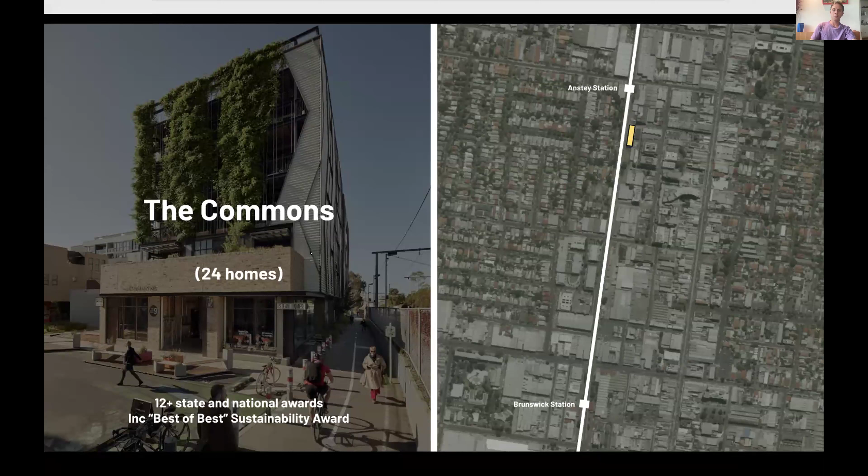The Commons has 24 homes and was awarded best of the best in the Sustainability Awards. Just across the road here, you may have seen photos of this project, is Nightingale 1, 20 homes. Down the road and in between these buildings is Florence Street Parklet. It's not much, just a little dead-end street, but it's a place of activity and life that we continuously activate with resident events.

Up the train line is Nightingale Anstey, which is 54 homes, tile houses, affordable rentals. Down the train line is Nightingale Evergreen, the first of 6 buildings in Nightingale Village. Nightingale Evergreen was designed by Clare Cousins, architect. Claire is an incredible architect and has been an absolute force on this project. As you can see, she's really adhered to the robustness and stripped-back materials. This is a north-facing, one-bedroom apartment.

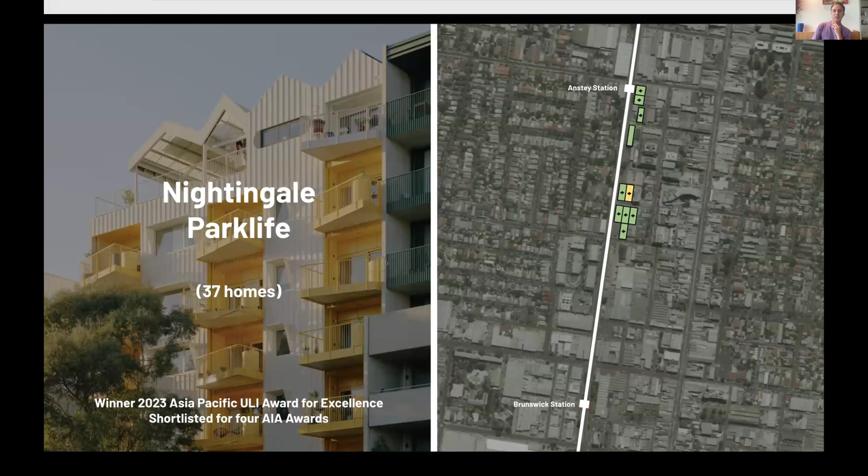Next to there, you have Nightingale Parklife. I'm currently sitting in my friend's house in Nightingale Parklife. It's designed by Austin Maynard Architects. As you can see, there are material selections that continue across buildings, but through minimal things like paint or just raw materials, you can see they allow different personalities.

We have Nightingale Left Field, designed by Kennedy Nolan Architects, 28 homes. This is their rooftop - it's got a beautiful sunny rooftop deck. This space has since grown incredibly lush.

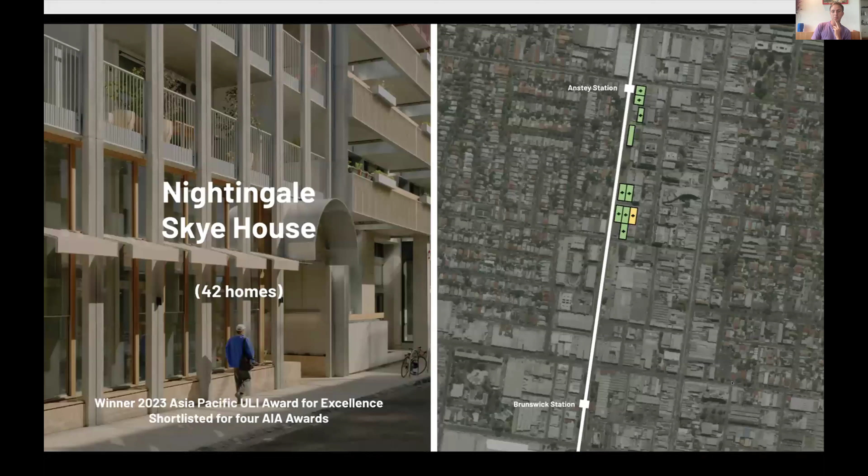We have Nightingale Courtyard, designed by Hayball Architects, a larger Melbourne firm who created an incredible project here. This project, in regards to its design, was centered around a central courtyard and had a variety of apartments available. We had Skye House, 42 homes, designed by Breathe Architecture, and this is a shot of the interiors there.

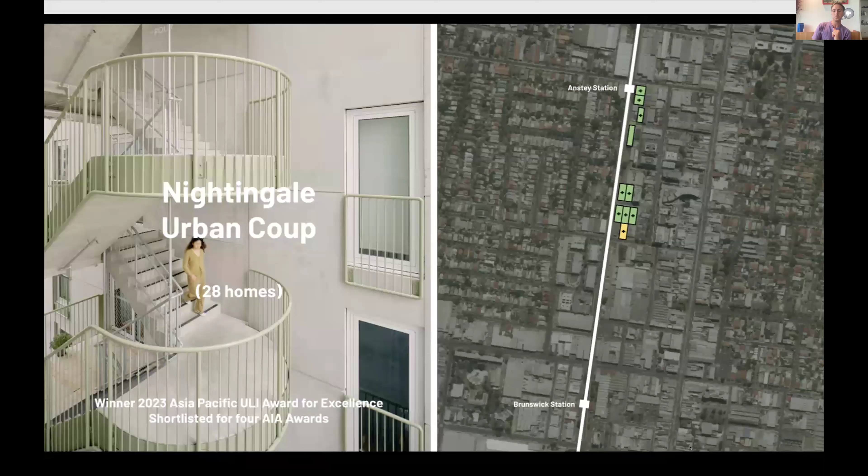This project has a mixture of 2 housing providers in it: Housing Choices Australia and Women's Property Initiatives. They rent 20% of this building out at affordable rates to either of those 2 groups. And lastly, Urban Coup, designed by Breathe Architecture, is a slightly different project, almost more of an intentional community where a group of people came to Nightingale to assist them with developing their home.

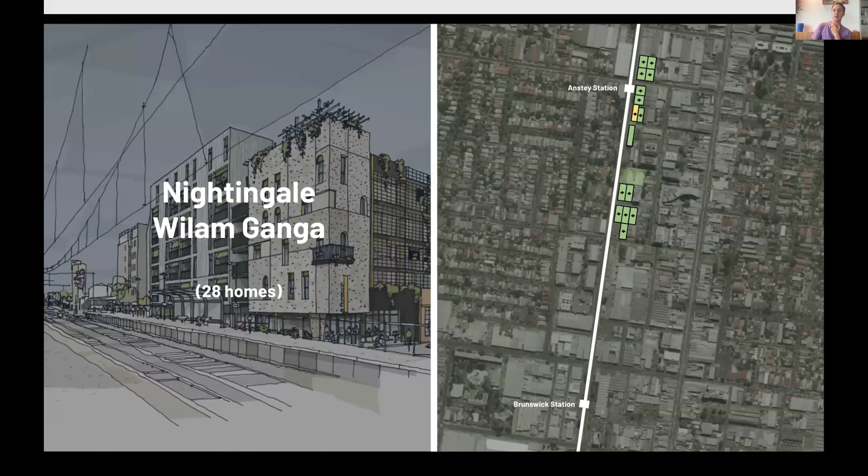We have projects in WA, Nightingale Fremantle. We have an incredible project in Adelaide, Nightingale Bowden, which, in regards to affordable housing, was part of an urban renewal precinct master planned by Renewal South Australia. This project was sold at affordable rates throughout the entire property, with the government subsidising the cost of the land and assisting with the development. 50% of the project is affordable rentals and 50% was affordable purchase. We have Nightingale Preston, a similar project, and hopefully Nightingale Brompton in South Australia coming up as well.

We recently completed Nightingale Ballarat, where you can see we reused a lot of materials - this is solid recycled brick in line with existing buildings. One of our older projects is Nightingale 2 in Fairfield, designed by 6 Degrees Architects, an incredible project, as well as Nightingale Brunswick East. About to go into construction is Nightingale Umarkoo Wayi, designed by Kennedy Nolan.

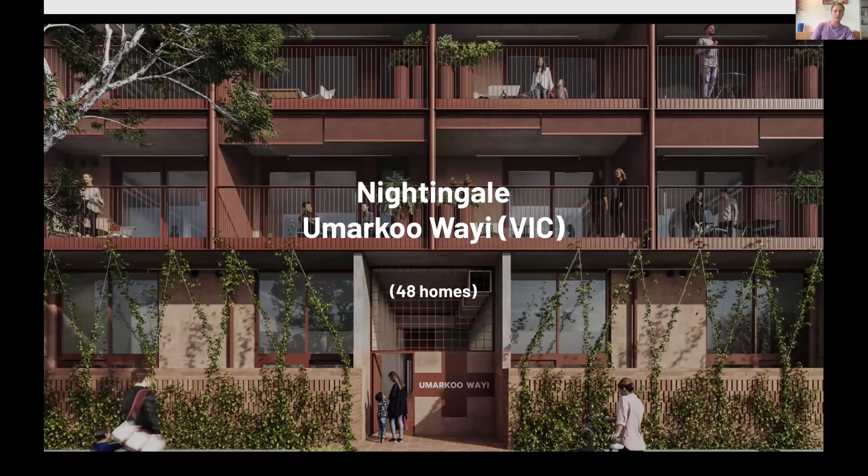Now, this project, Nightingale Marrickville, is based in New South Wales. There's 55 homes there, and this is a new project for us - it's our first full rental. It's land that is owned by a church group.

There was a church on this site of land, and they looked at it and thought, we can do better here. This church is currently utilized for Bible studies about 2 hours a week by 12 people, and for them, that wasn't delivering on mission. They said what this community needs right now is affordable housing, and they came to Nightingale and asked us to assist in looking at this site. So they are the developer, and we'll be renting out these units starting next week. I'm actually going up next weekend to have an open inspection for potential tenants, who will be rented at 80% of market rent in the Marrickville area.

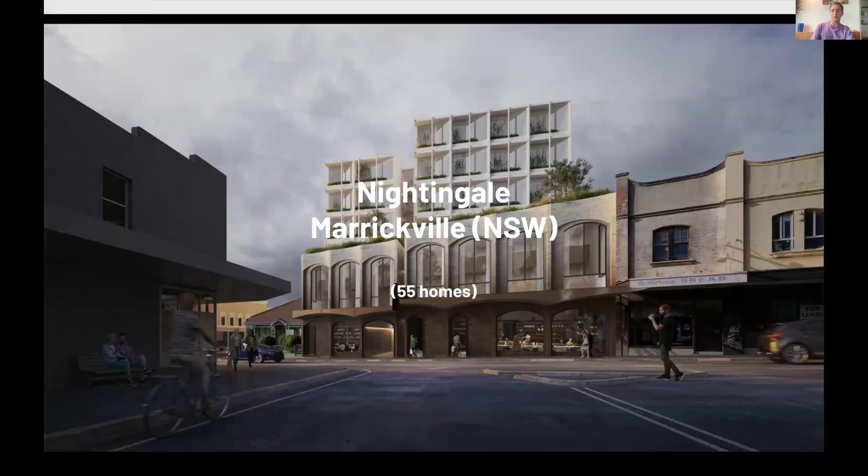We hope that projects like this will cause others to do the same and take initiative within their own council.

I guess some of the things that we face as barriers - we're pretty happy to talk about all our wins and all our beautiful projects and the incredible architecture, but I think some of the things I wanted to talk about this evening is having access to land.

Land prices in Sydney have locked us out of Sydney, essentially - they're too expensive for us to build affordable homes on, sadly. And land is getting harder and harder to come by. It's also a tricky concept in Australia where it's unceded land as well, and so we're essentially building on stolen land. We'd be open to many different initiatives regarding leasing land, government-owned land, or land trusts, but primarily we do buy and develop on land.

Something that's a huge barrier to us and to many people is access to impact investment. If we are trying to deliver affordable housing, there's the cost of the money to develop - we don't have a huge bank balance, we don't have money in the bank per se. We have to go and find people to invest or loan us money. In Australia, there's this expectation that if you lend someone money, you need to make a healthy return, which is kind of an investment term that can add percentages and percentages on top of the cost of housing. So for us, if there was greater access to impact investment, which is investment based on a lower return, we believe housing prices could go down.

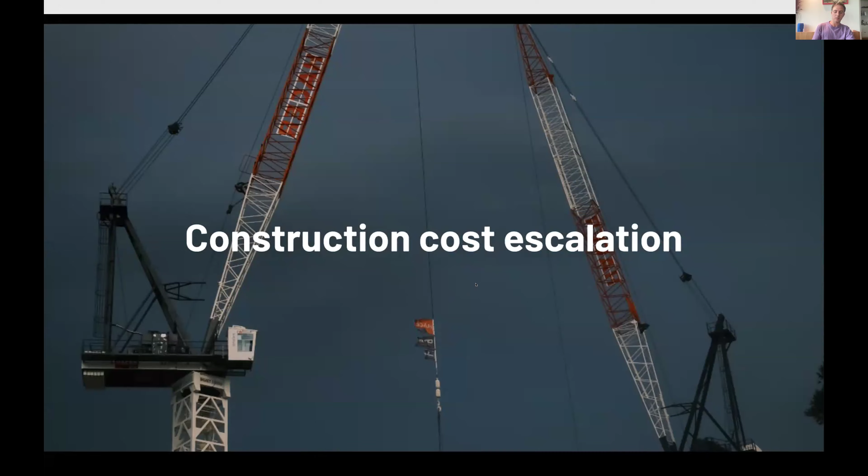As you're probably aware, construction costs have escalated significantly over the last few years. There's also challenges for the CHPs, the community housing providers, though the recent change in federal government has meant things like the HAF fund are changing. I know Victorian state government is taking initiatives, and Queensland has recently released a raft of changes and targets for affordable housing. We hope this can assist CHPs in providing housing.

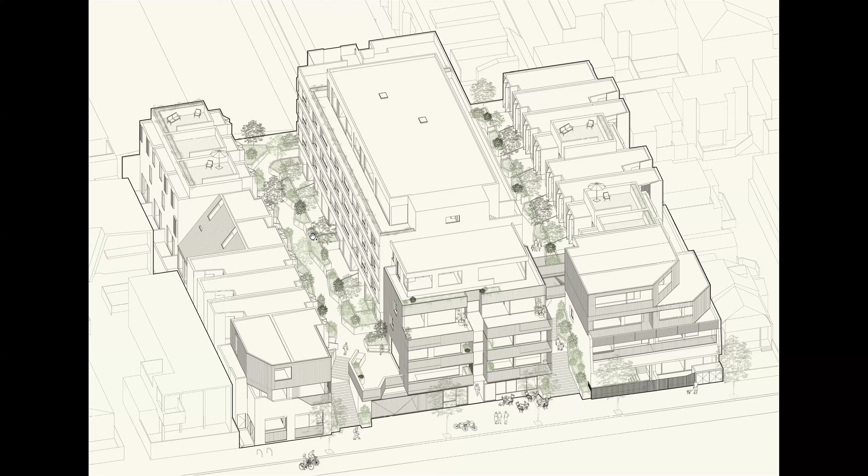And then we've got raised landscape spaces, and here's a cross-section through it. So we had a few issues. One was that we actually had quite a contaminated site, so we couldn't, and also didn't want, to spend all this money building an expensive basement. Very much like Nightingale, we wanted to focus where we spent the money on the things that really matter to the end occupant.

As a cross-section, you see through here the 3-story townhouses on the side. We were very, very keen from the outset to make sure it's a diverse community, so we designed it to have a real mix of different apartment sizes and types. It's actually been a very successful community from the point of view of being diverse — we've got elderly people all the way through to very young people and families. It's a lovely, diverse community.

One of the things that's really helped make the community diverse is that with these townhouses, the ground floor is able to be a completely separate unit — literally this idea of a granny flat. What's really cute is we've actually got two grannies living in separate little granny flats downstairs, while the middle floor is the living space and bedrooms, with the younger family above.

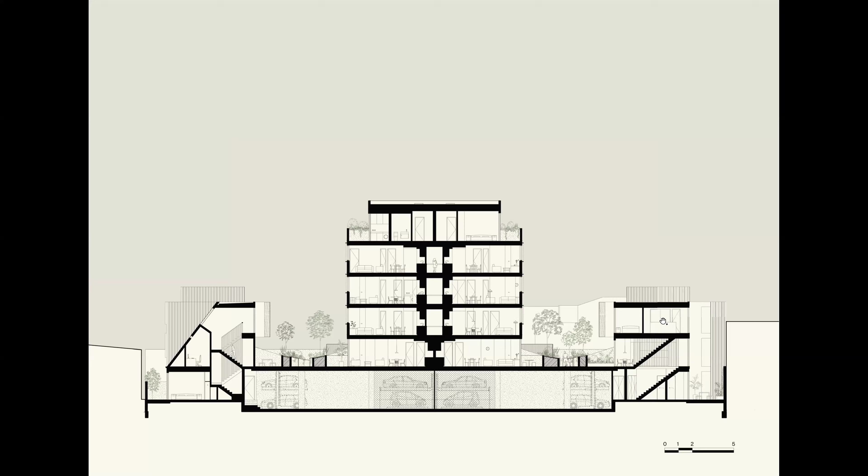If there are any detailed questions about any of these projects at the end, we can always come back to these plans. But really, this is a car park, and I'm going to talk in a bit of detail about car parking when we come to the next project. There's, I suppose, an important point to be made there.

In designing this building, we not only did these sort of surveys, but also did a really systematic analysis of what are the perceived and actual disadvantages in apartment living — what are the things you can't do in a typical apartment building. I'd also spent 4 years living in Denmark and got incredibly inspired by the communal housing that happens over there.

So we incorporated a couple of features into this building that have been really successful. The first one is a multi-purpose communal workshop, and rather than putting it right at the back of the car park, we've put it right at the front of the building. We also have a communal room right at the front of the building here.

It's a 65 square meter space, owned collectively by everyone in the building — we all own it — with an online booking system. It's a really great space because it's adjacent to a little outdoor barbecue area, right next to the staircase where you come up, and it's this really lovely little hub that fosters real neighborliness.

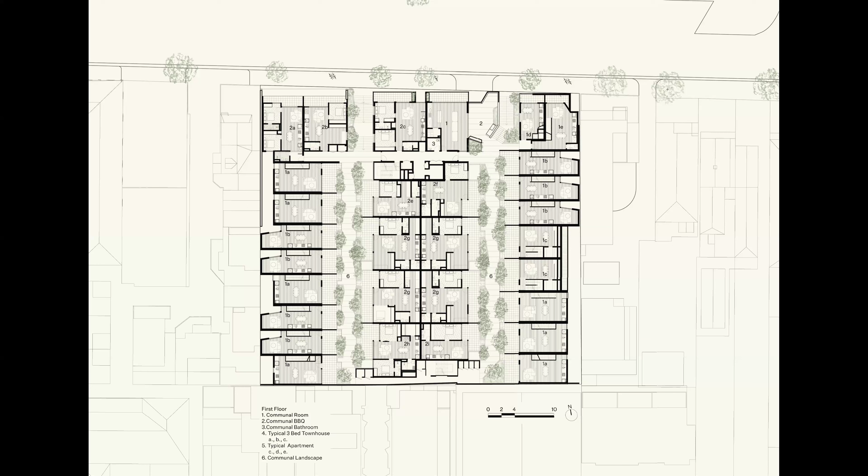The whole idea of this building is about encouraging neighborliness and the kind of interaction between people, really about striking that balance between privacy and ensuring that putting privacy screens and things in doesn't result in isolation. As you go through the building, you can see it's a double-loaded building. In the second project we did for Assemble, we learned from a lot of the mistakes we made in this project.

With architecture, every building is a kind of prototype and you learn a lot of things. The biggest mistake we made in this project is that we actually had gas in the building, so that's something we're now working with the residents to try and retrofit.

It's funny how quickly things change. By the time it was like, everyone's got to have gas stoves - this was 7, 8 years ago - now it just seems crazy to put gas in anywhere.

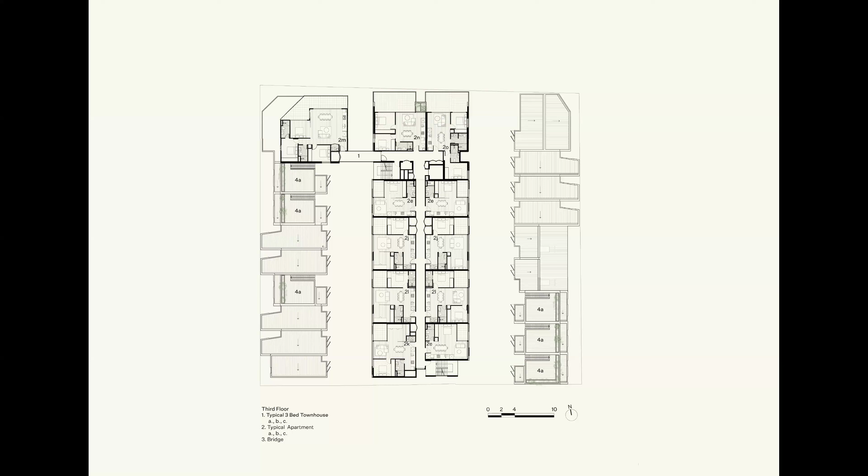By having those large staircases that lead down with no gates - it seems like a very small thing, but we had to work very hard to convince all the stakeholders involved to not put gates on those two staircases. Anyone can wander up, and it's proved to be a very successful thing because it's this kind of invitation to the community, but anyone that does come up is very respectful. You speak to this idea of passive surveillance, and this is a space where you really feel that passive surveillance works very beautifully.

The other thing is out the front we've got that multi-purpose communal workshop. It's not a glamorous space, but it works as this lovely space that really does foster that sense of neighborliness. I just took this little snap a couple years ago - this was actually just before COVID, but it's a fairly typical scene.

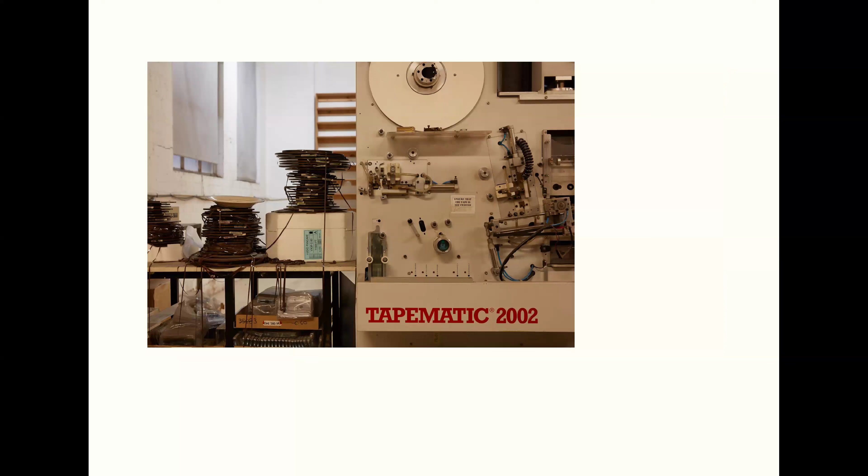There's all these wonderful old machines in there, and a series of diagrams that explain our design thinking with the site. So that's the existing building.

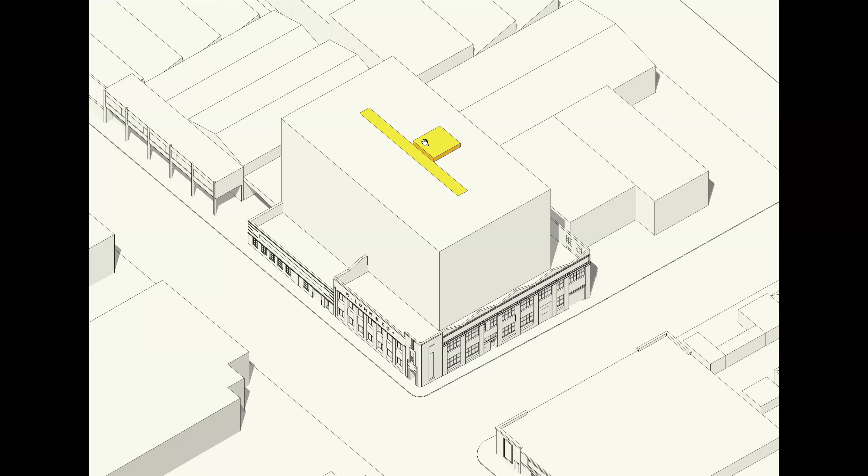A typical approach, and in fact the approach we took in the first Assemble project, would be to do a double-loaded apartment building, where you've got apartments on either side of a central corridor and a lift. We wanted to do something a lot better than that.

So what we did was split the building open. This fundamentally improves the daylight, amenity, and most importantly, cross-flow ventilation. You can draw all the little wiggly arrows you want on a double-loaded apartment plan, but you don't get true cross-flow ventilation unless you've got proper windows on both sides of the building.

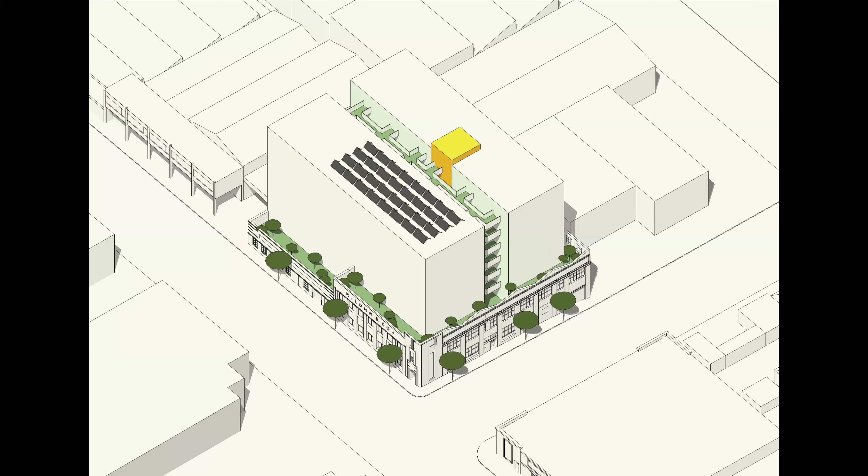It was a real leap of faith for the whole project team, and we're very grateful to Melbourne City Council, who jumped on board with this idea. They allowed us to step out of some of the planning envelopes - this iteration here would have fit in the planning envelopes, but they allowed us to challenge and reduce the setbacks because they believed in the improvements to amenity that would result from this. In this project there's also a huge focus on communal amenity, which I'll speak to in more detail in a moment.

Here's a cross section, so you can see the retained warehouse space - we tried to retain it for at least a room depth. But the main thing I want to point out is that every single apartment gets a completely private terrace, in this case facing south or facing north.

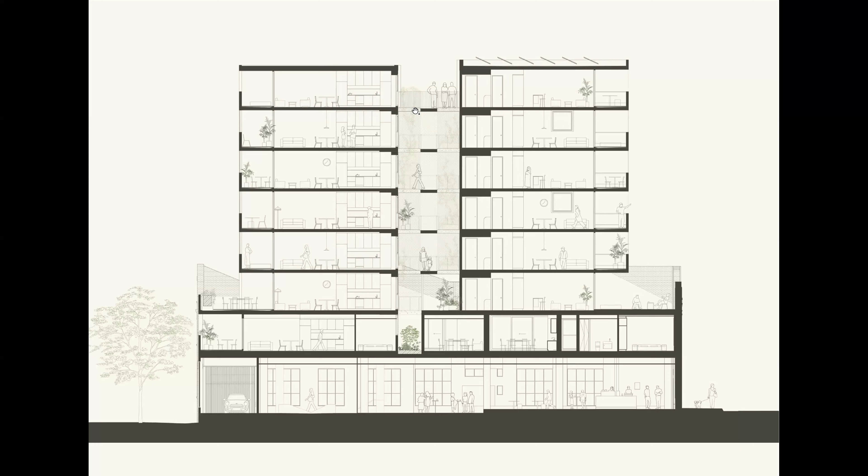That's the other reason for the orientation of the site - we wanted to try and get as much northern light into all the apartments as possible. With a double-loaded building, a completely south-facing apartment, it's impossible to get any northern light into it. So each apartment gets a totally private terrace, and their living spaces connect back through a series of little bridges that go into the communal walkway in the middle - these are sort of semi-private access spaces through the back.

On the north, we've got these ribbon balconies that wrap along the full length of the facade, with a series of perforated screens, but those deep eaves work really nicely in summer. We try to minimize the windows facing west.

This project is 100% gas-free, and it's actually powered entirely by a wind farm in Hepburn. Assemble made a deal with Hepburn Wind, which is really exciting - there's a direct correlation between the energy producer and the building, which is wonderful.

All the glazing in this is thermally broken. It's sort of crazy that it's not mandated in Australia for everyone to have thermally broken glazing. I think things are thankfully slowly shifting - double glazing came in about 10 to 15 years ago, and I think we'll all hopefully need to be putting in, or be mandated to put in, thermally broken frames going forward. With this building, things like the thermally broken frames are examples of where we really try to invest in what makes buildings pleasant to be in.

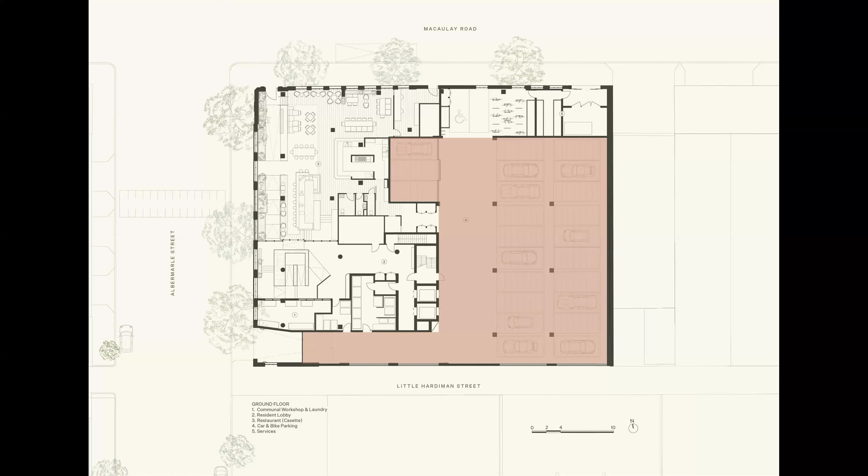We also incorporated soft fall recycled rubber covering, because the building is very much designed to be a place for children - we've got lots of children in this building, and for pets. So the choice of materials, like this very robust dado that runs through - we've actually tiled all the communal spaces up to a certain height, because we learned from our first Assemble project where we didn't have these robust surfaces, people with dogs and kids and prams, it all gets very scuffed up. Part of designing these buildings is to make sure they age in a graceful way.

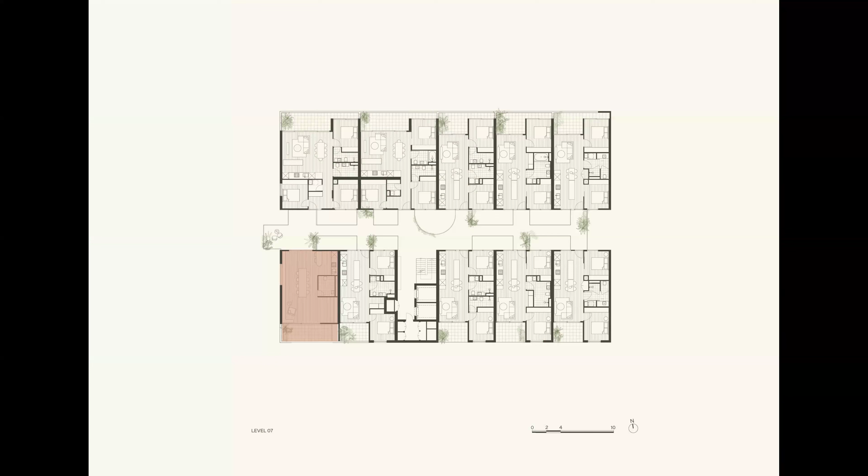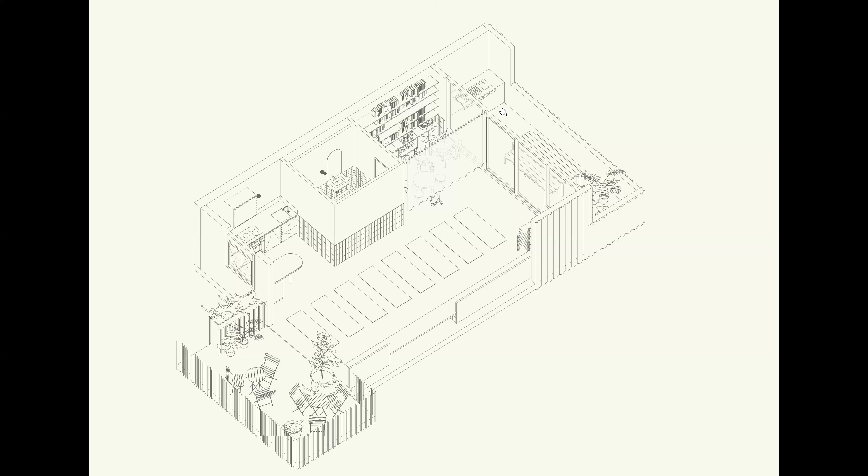The communal room is an improved version of what we did on the first Assemble project, with some little diagrams about the different things that can be done in there. It's designed to have a little kitchen space, a bathroom, a corner which is a library and a bit of a kids' play area as well. It's got a linseed oil, marmoleum sort of resilient flooring, and a little barbecue area out the back.

Our next project, taking us up through the scales, is currently under construction in Brunswick, very close to Nightingale Village and all the Nightingale projects—in fact just a little bit further south in Brunswick. It's a larger site, about 180 apartments.

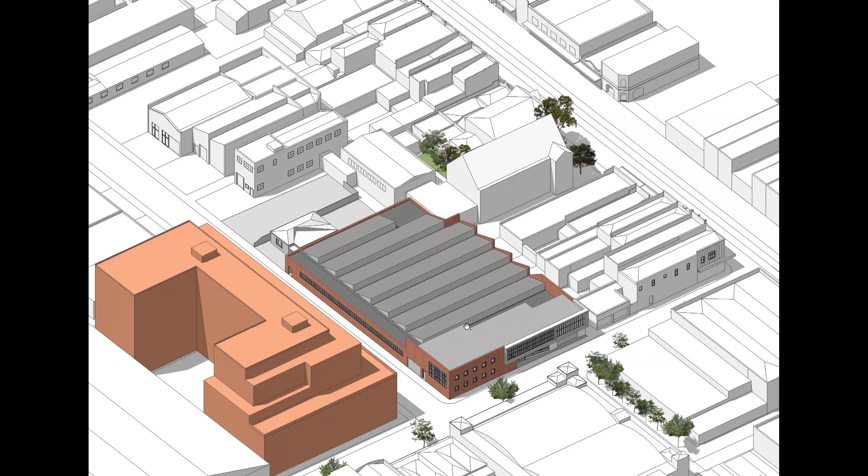So in this massing diagram, rather than do the typical double-loaded corridor approach, what we did is open it up. This is a big U-shaped building, with two cores coming up through the building—one southern core, one northern core—so that all the apartments have got that lovely double frontage and proper cross-flow ventilation.

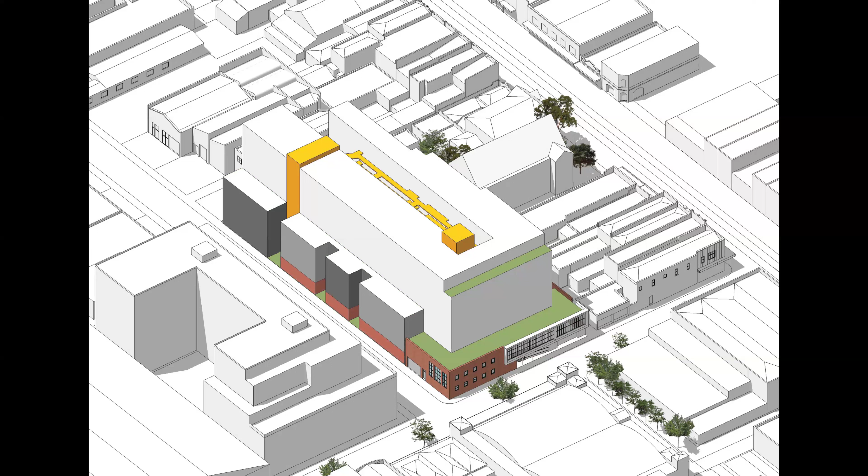We then took that mass and carved it into a series of smaller modules. It was very important in this particular context, which is undergoing rapid change, to make sure the design is able to mediate between the lower scale of the existing buildings and this larger scale that's starting to emerge, trying to be respectful of the scale and character of the streetscape.

So that's the articulation story we went through, and I've got some basic plans to take you through. Essentially on the northern end—a learning we had from the second Assemble project is that there's a lot of need, when people are moving, for a big goods lift.

So in each project now, we've got a passenger lift and a big goods lift that you can put a queen size bed in. There's a big oversized lift there, communal workshop, bicycle repair space, almost like a cobbled laneway that takes you in.

Through the middle there's an extensively landscaped space, and really one thing we've realized with the project I showed you before, Macaulay Road, is as the greenery has really established itself in that central space, it's having a wonderful cooling effect. I didn't include a slide, but on the lowest level of that open walkway, it's almost like a rainforest now. It's a really beautiful space to be in on those very hot days.

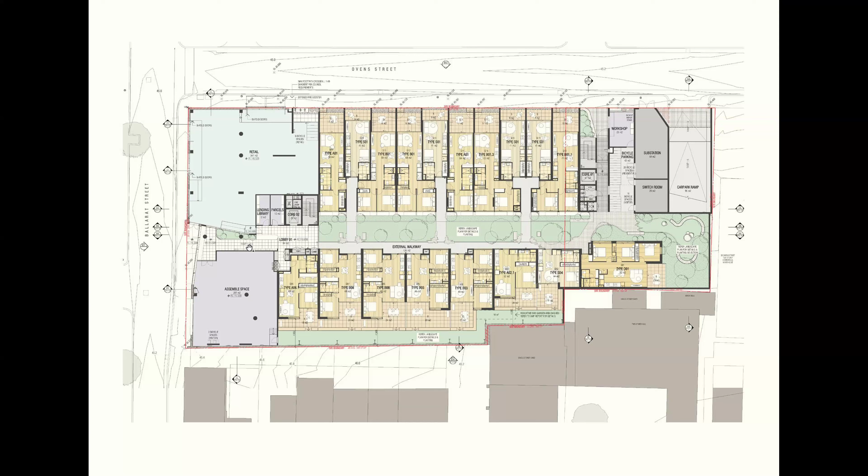On the southern side, we've got a more formal lobby entry. Then as you go up through the building, you can see this is a larger version of that idea, where we've got all these apartments with dual frontage, and apartment typologies where you've got 2 bedrooms that wrap around to a living space, going up through the building.

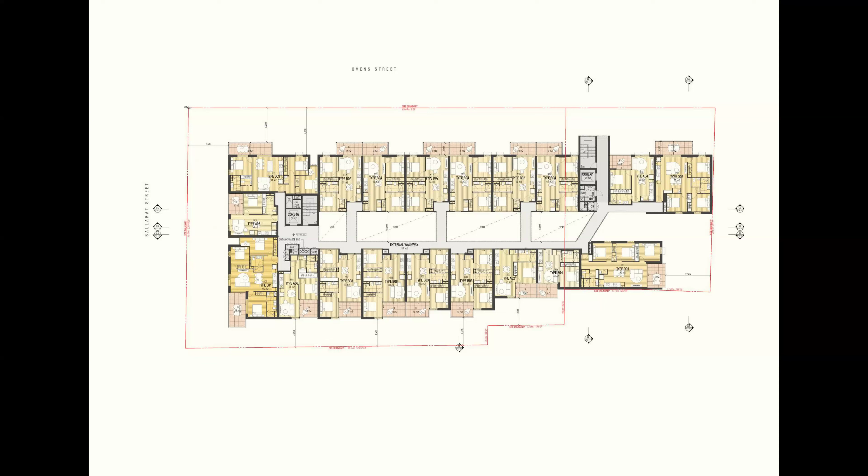Unfortunately, in this project we had to introduce a series of steps which do reduce the structural efficiency of the project, but we had to do that because of the planning controls we had. It's a very tricky thing, but there's a really strong push by councils here to have these podium and tower forms. I spend my life battling against that a little bit.

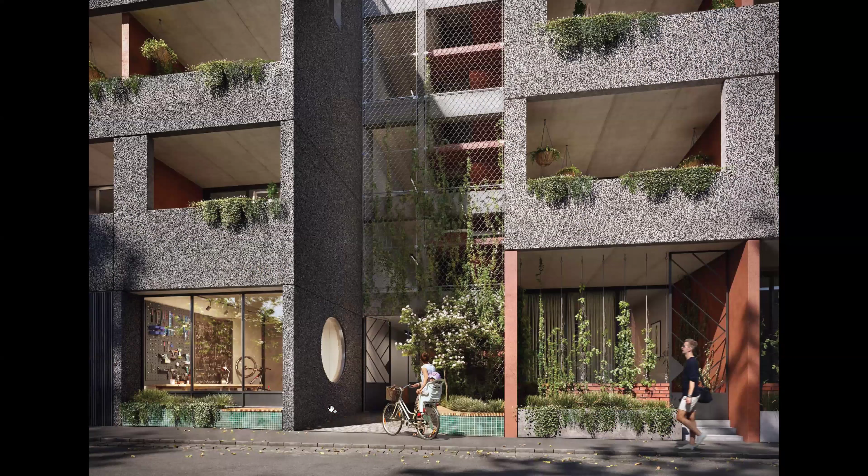The material of the forms going up the street is actually concrete with a crushed bluestone exposed aggregate, so a very rough, robust materiality. On the lower levels, we've got apartments that face out onto the streetscape with planter boxes, and we didn't want to over-enclose these. There was a lot of debate, but what we've introduced is a bit of a gate and some fine wires for creepers to grow up, giving a sense of separation between the public realm and the private apartment.

And then you can see here on the left-hand side, the multi-purpose communal workshop with a bench seat at the front. And this is a larger version - a larger community workshop with more amenities in there.

And then the staircase - like Nightingale, we always try to do our staircases as external wherever we possibly can, rather than the miserable enclosed fire stair that no one ever wants to use. If you really try to celebrate the vertical circulation, open it up so you've got views and a beautiful breeze coming through, lovely ventilation, it's much more likely that people are going to use it.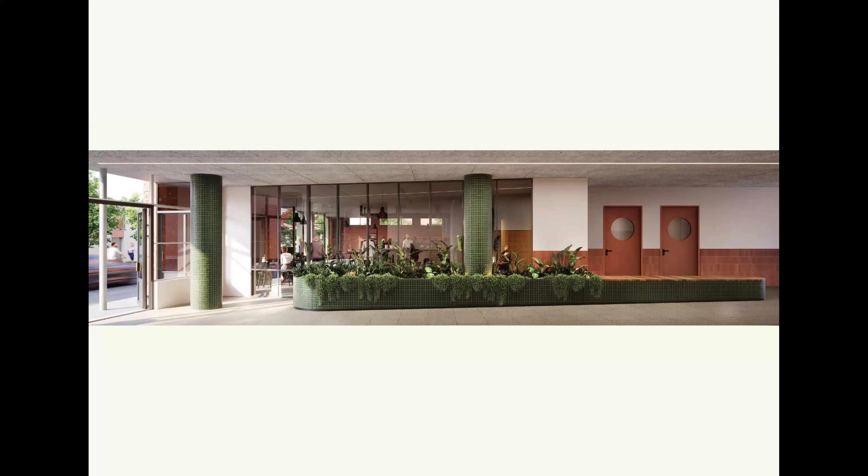The lobby space - why did I put these circles on these doors? I don't know, I was feeling that they kind of got a bit of a bistro vibe. But I think what it was is that, you know, for our parcel room, and also I should mention...

All Assemble projects have got what's called the lending library, which is a room with shelves covered in things that you might only use once every few months, like a dehydrator or a slow cooker or a drill. It's stuff that Assemble has purchased, and then people can also donate. It's this really lovely communal amenity where, for example, at where I live, we've got the lending library set up there, and I use the dehydrator every few months, but I'm glad it's something I haven't bought and isn't using up my cupboard space.

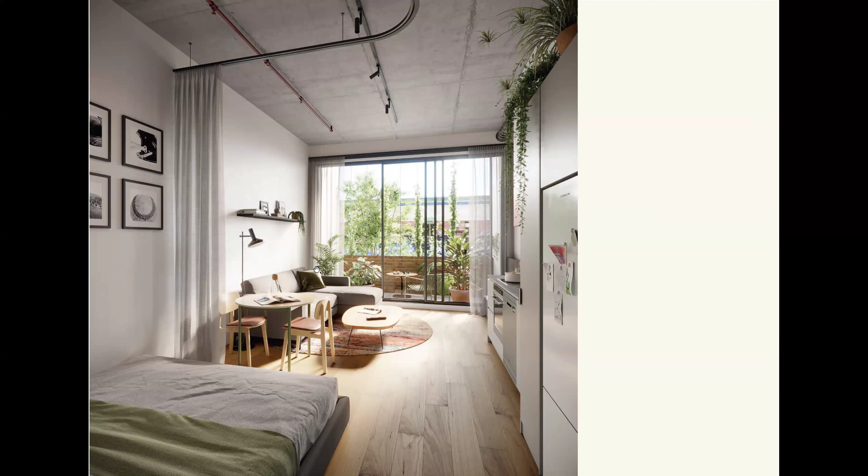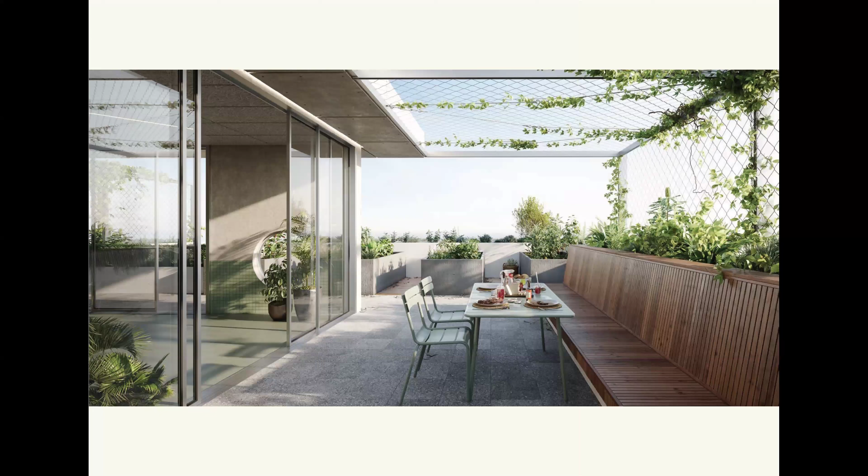Some views of the sort of typical apartments, again with windows and glazing from both sides. In this project we've also got some much smaller units, very much like Nightingale, trying to find a way to bring the price points down. These are roughly 40 square meter studio apartments, and then some communal amenities at the top.

And then these two very large communal spaces adjacent to each other, which can be split with a folding door. Again, this is a larger scale version.

The last project I want to take you through is the biggest Assemble project we've designed to date. It's also in the same neighborhood in the inner north, Brunswick, not far from Nightingale Village, just a little bit further south, about 200 meters south of the project I just showed you. It's on this main train line that runs north-south, and all the beautiful Nightingale projects are up on the top of the page.

It's a very challenging and quite interesting site. For a long time in the office it was a confidential project called Project Bunny, because it was actually a factory that manufactured chocolate bunnies and Easter eggs. When we went in there, there were all these chocolate bunnies, so we called it Project Bunny for a while.

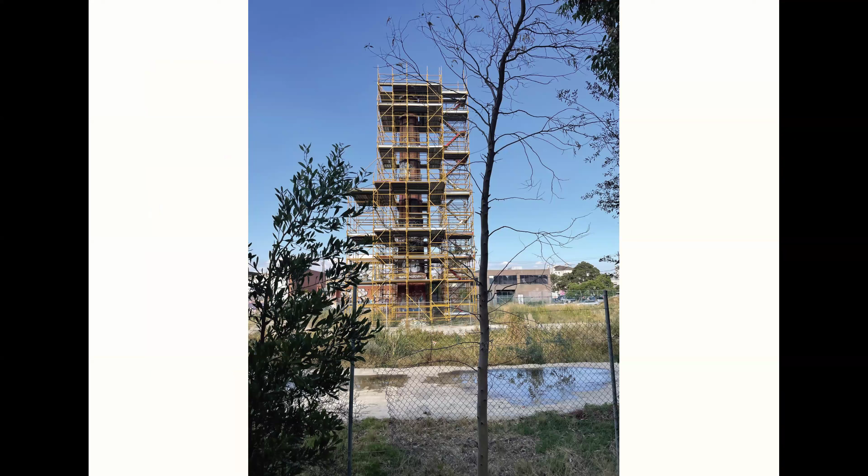It's next to Brunswick Station and has on it a little industrial remnant, an old chimney. Quite a long time ago, one of the previous owners was actually caught red-handed trying to knock this thing down with a sledgehammer by the heritage authorities, and it's literally in this half demolished state, you can see on the left-hand side. So we're proposing to keep that chimney, not to restore it, but to actually leave it like this as a kind of little urban ruin.

So you can see a theme with this of these sort of diagrams. I really love doing these very simple diagrams. When we teach at uni as well, we always try to emphasize to our students to just keep their diagrams as simple as possible to explain the design thinking.

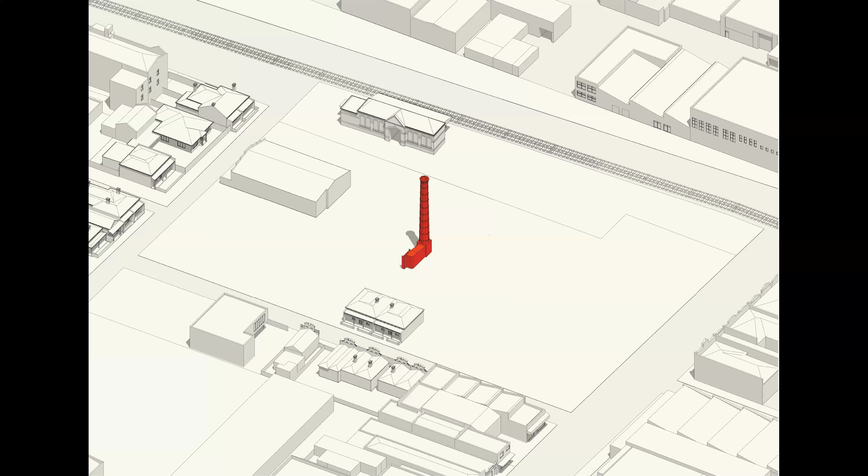So you can see the site there with the chimney in the middle, Brunswick Station, and then these two little heritage houses that we need to retain, and also being respectful of this little cluster of heritage Victorian terrace houses opposite.

There's actually a proposal to raise the rail all the way along that section. In Melbourne we've had a very successful program of removing level crossings and putting in raised rails, producing quite lovely amenity underneath them. So that's going to happen along this railway line, and that's something we have to design for.

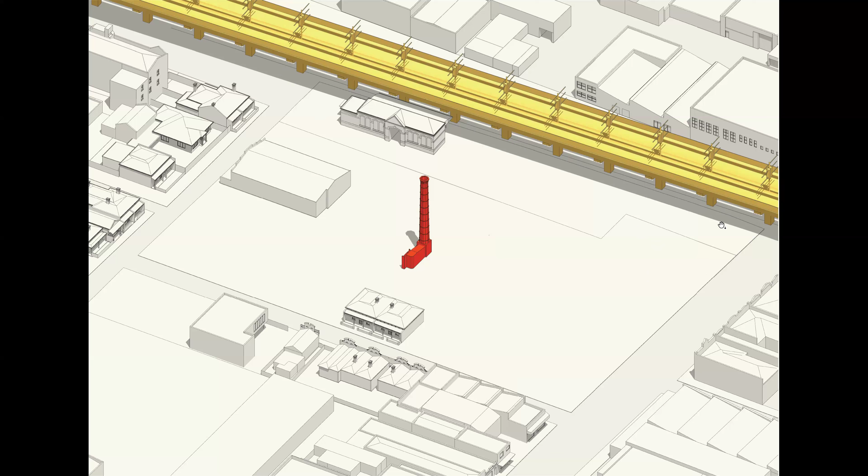In Melbourne, we're often given these sort of Design and Development Overlay envelopes to work with. So I suppose the starting point was to say, okay, this is the envelope we have to work with. We were very keen to not introduce any cars into the site on the ground plane, so we wanted a fully pedestrian environment. We wanted to introduce strong pedestrian connections and make it actually a very public ground floor, not privatizing that ground floor.

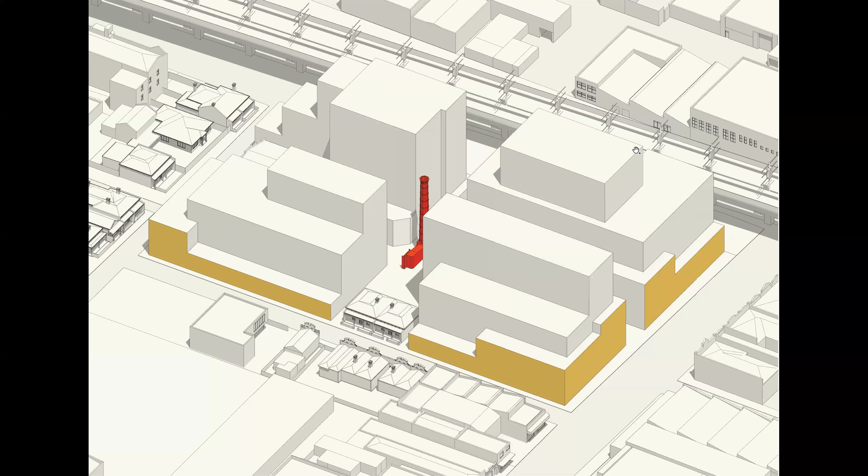These were diagrams explaining how we wanted to redistribute some of the mass, because in some places we wanted to make the building taller than what the Design and Development Overlay would allow, but in other places we could make it lower. It was this idea of scooping the mass from one area, taking it away from places where it might impact neighbors, and putting it into the center of the site where it's not going to overshadow anyone. And then this real challenge of saying, well, how can we have a 12-story building?

In this case, the tallest portion is 12 stories. And how can we mediate that scale difference between the single-story terrace houses and this?

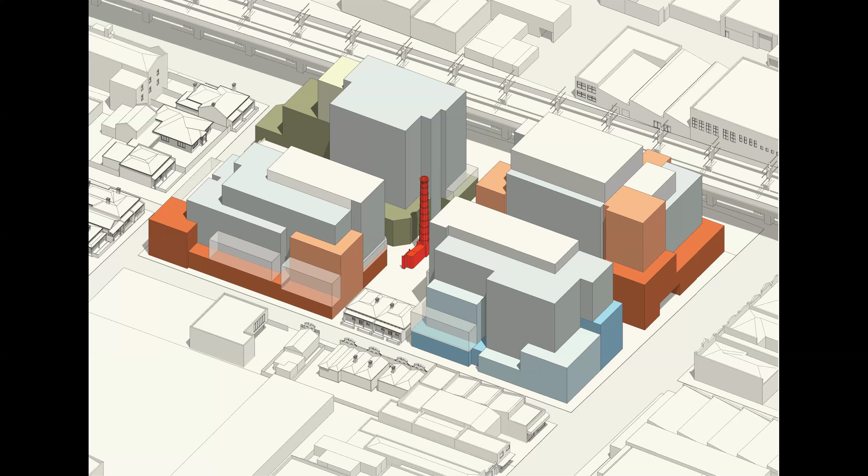A really big challenge for us in Brunswick is it's an incredibly diverse urban environment with a beautiful charm. We certainly didn't want to do what a lot of new projects in Brunswick have been doing, which feels like they've landed this glass spaceship there. It wanted to feel like we picked up on elements of the local DNA.

One of the things we're trying to do more on every project with Fieldwork is this notion of caring for country, and how we can design with country more, starting to shift away from this idea of human-centered design, which feels like a very early 2000s concept, to ask what country-centered design means. What does it mean to reintroduce little moments of habitat, or to peel back the layers and see what was there before.

Something quite beautiful that's been occurring on the existing site is that because it was empty for a very long time, a natural wetland has formed in a hole in the ground, with frogs croaking and birds visiting. We think, well, how can we have something like that happen here?

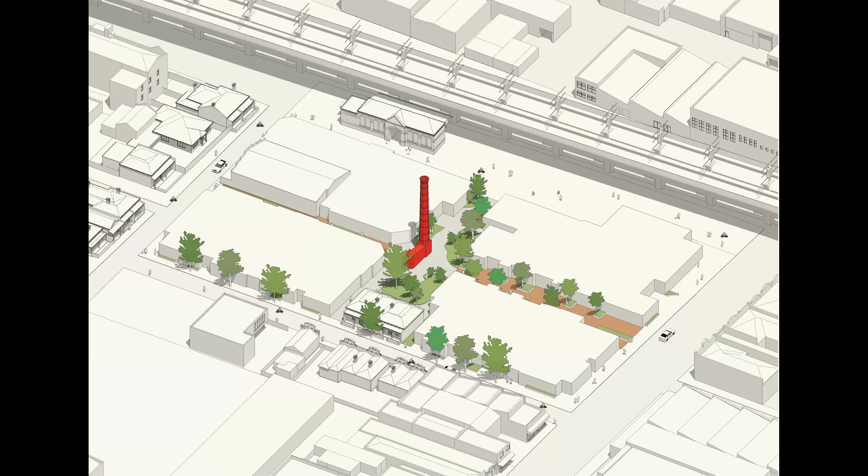So the idea is to have this little pocket of wetland and indigenous vegetation, with slightly tighter north-south laneways then coming into the central space.

One of the things that's wonderful about working with Assemble these days is that we've got Andy Fergus, a very well-known, very respected urban designer, who's actually a resident in one of the Nightingale buildings as well. We work very closely with him on our urban strategies for the Assemble projects.

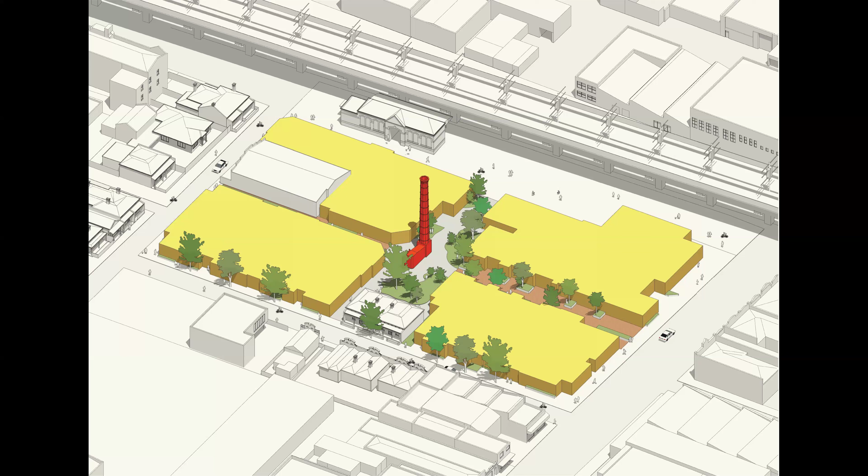On the ground plane we've got this idea of a real mix of functions. The light purple functions are the Assemble facilities, so the communal rooms, the parcel rooms. The darker blue are office and co-working spaces, and the very light blue are a mix of different hospitality spaces.

In this project, we're very happy that we didn't end up having to put a big supermarket or something like that. We've actually been able to put real diversity and fine grain of ground plane uses in order to maintain that diversity and activation on the ground plane.

We've also got the lobbies as through links. Each lobby has bicycle access into the bicycle storage, but also through links to buildings so the residents can go through.

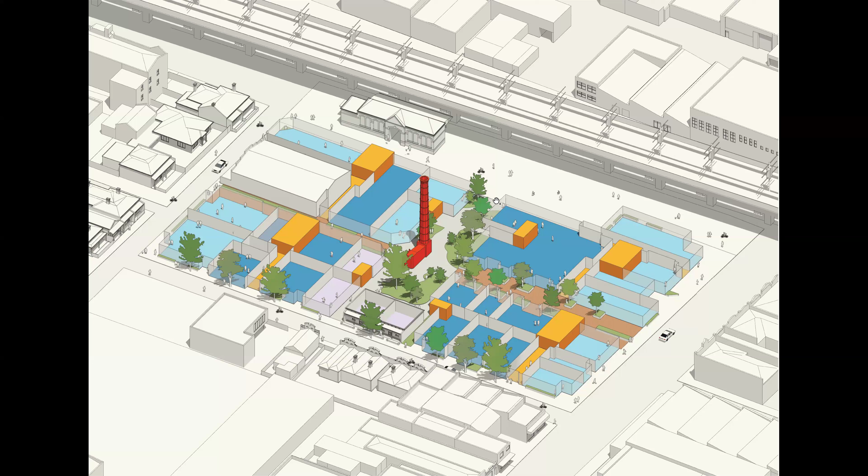But of course the main north-south and east-west laneways will be public 24 hours a day. So the buildings, as they step up, we've introduced a series of steps, really expressing the vertical circulation on the outside and celebrating that.

We realized straight away that a successful ground plane was going to be key to this project being successful. So we did a study, and Brunswick truly is a very quirky, beautiful neighborhood. We did a series of studies of all the little shop fronts in the immediate area around the project.

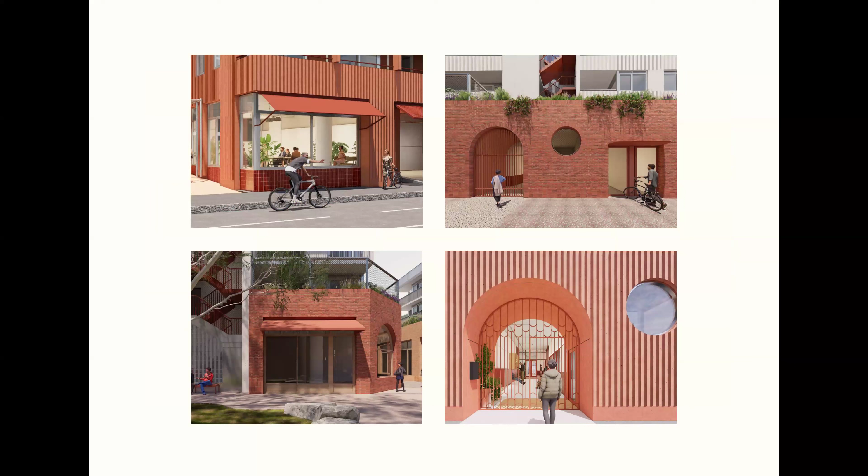That led us to develop a series of little vignettes. We were very keen to make sure the building had these interesting moments of character and interface, introducing little moments of tiling, timber door frames, and little canopies, really thinking through these moments of interface.

It's very often one can overlook, when thinking about creating this big heroic gesture, that a tall building which has very carefully considered its ground plane is a much more successful part of the urban landscape than a smaller building that's completely neglected its ground plane.

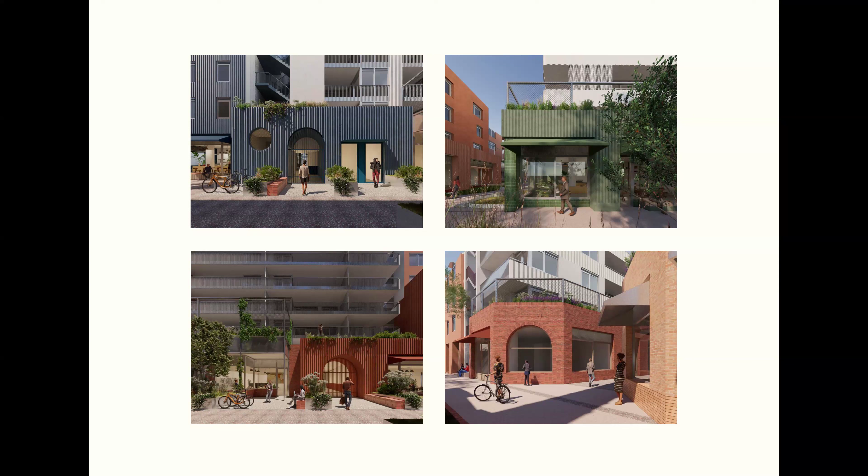So I really emphasized to you the importance of getting these lower levels right and thinking about them. It very much comes down to the detail and how you transition scale, and thinking about things like wind and how you can help modulate that as well.

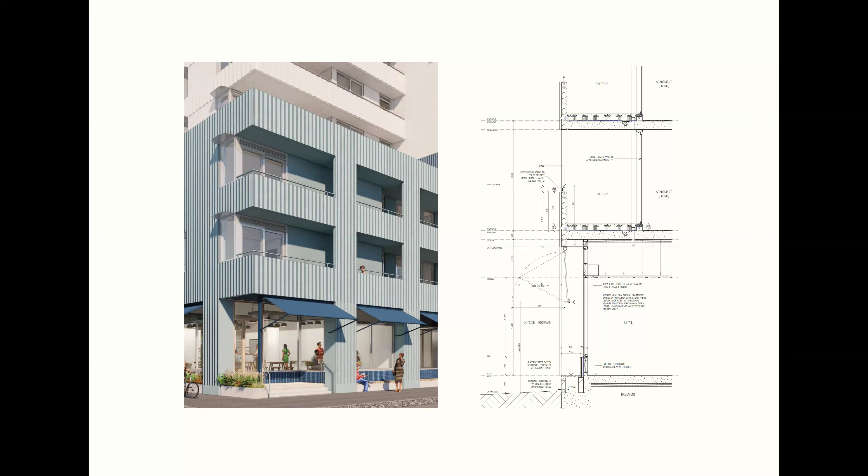So we've got some details here, introducing cloth awnings. In Melbourne, a lot of the councils try and force you to do these long, solid canopies that end up being big, chunky, horrible things. So this is us trying to say, how can you provide some measure of solar protection, but in a more beautiful way.

And to that point of picking up on local DNA, there's this idea of what are the materials that feel right for the area. We've got elements of recycled and reclaimed brickwork, little elements of glazed tiling, galvanized metal, and some of these little vignettes.

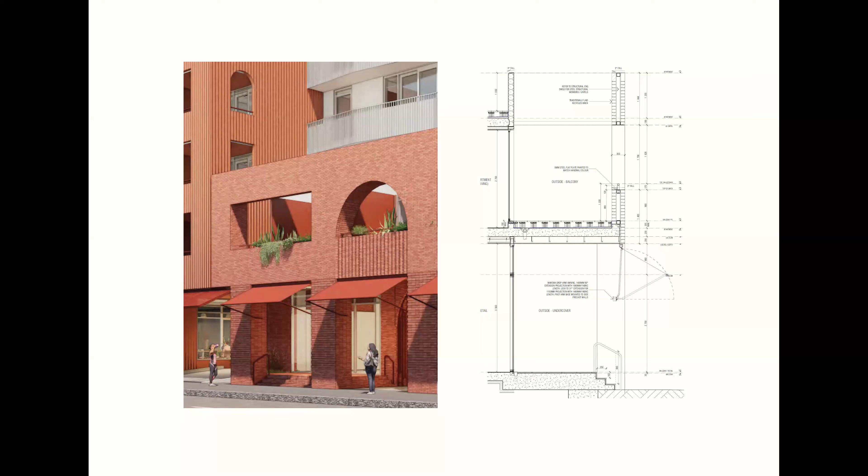This building here on the corner is actually proposed to be built entirely out of bricks reclaimed from the warehouse that we're demolishing on the site. And in fact, we're even taking the galvanized metal to these balconies and folding them, the way that you fold air conditioning ducting. So that's just a little bit of Brunswick DNA in there.

And here's a series of images of the project. We're doing this very quirky little hand-stacked brick corner, wrapping around there. And this is very much trying to balance repetition and structural efficiency, but at the same time that idea of respect and stepping down, trying to create this amalgam of different buildings.

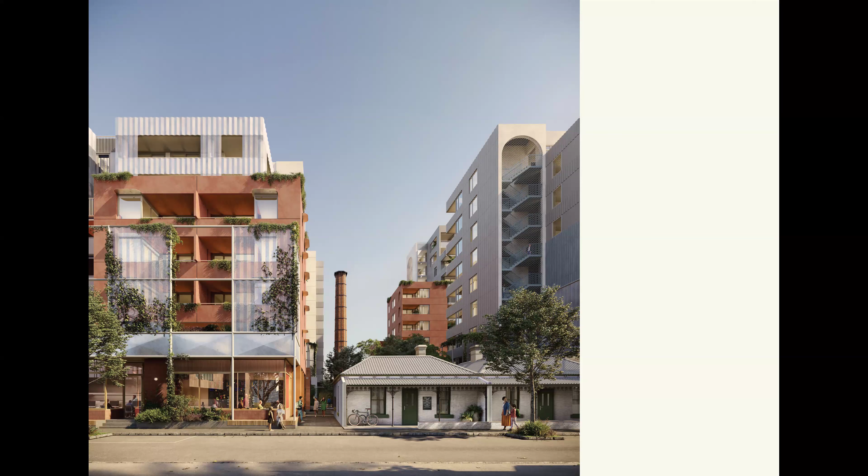And a lot of getting these urban spaces right is about tightness as well - not just having these big expanses of space, but narrowing down and opening up, but always with a view to safety and design, making sure there's no dark and dodgy corners as well.

Five minutes, okay? Absolutely, that's pretty much on the second last slide. So that's perfect timing. Thank you, Mike.

And a couple more views coming around to the back. And then really just finish on this last slide, saying that what we're trying to achieve with every one of our projects for Assemble, but also just across Fieldwork, is this idea of a possibility of a win-win project - that actually when you introduce a new building to an area, it shouldn't mean a detraction or loss to the local area, that it can be a win for the residents, a win for the broader community.

And for us, the really big focus now in Fieldwork - we've just turned 10 - our next 10 years are going to be mostly focused on the environmental impact of our buildings. I think as a profession, that's where we are really still having much more of an impact than we should be. So with Fieldwork, the huge push at the moment is decarbonization of construction. That's really our big push. We certainly are, as architects, using much too much concrete.